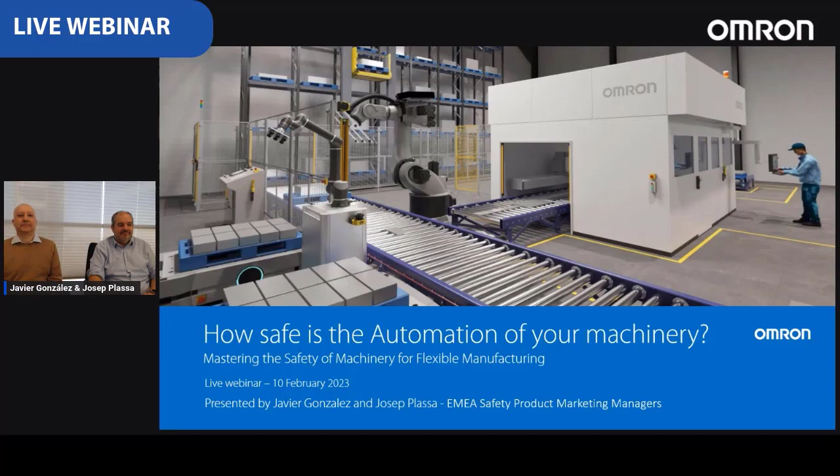Hi, I'm Javier. Today I will perform as the Health and Safety Manager. Hi, I'm Josep, and today I will perform as Safe Automation Expert from Omron. Nice to meet you. Nice to meet you.

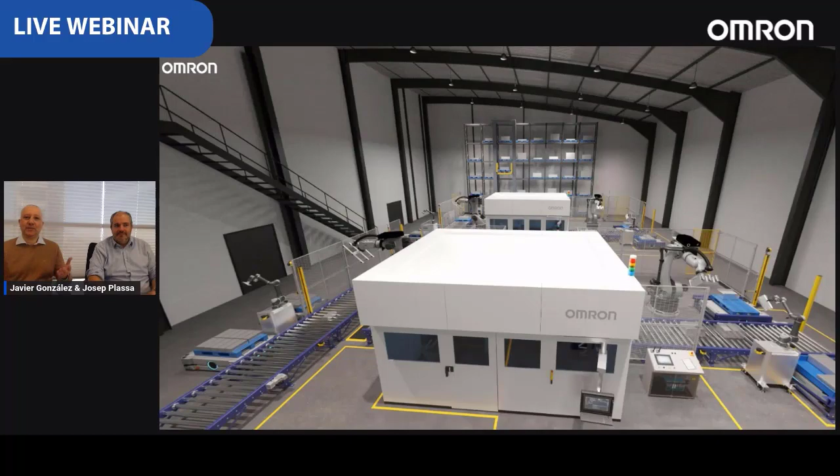So, welcome to our factory. As you can see, in our company, we are producing battery cells for the automotive industry. We are implementing efficient and flexible manufacturing by employing new technologies. Our target is to become a world-class production leader in the automotive industry by proposing an intelligent production automation system.

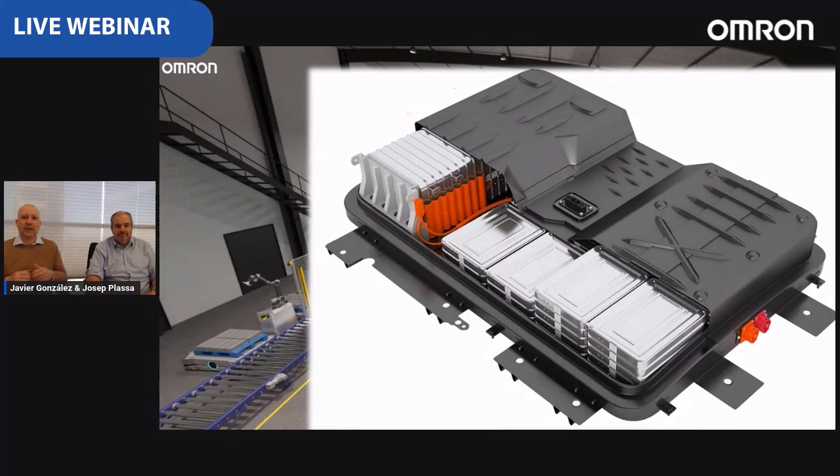Could you please introduce your company briefly? Because I'm not very familiar with it. Yes, of course. Omron is a safe automation supplier which advises, produces, and delivers globally, providing safe automation solutions and sharing expertise with you. Let me show a short video about our company.

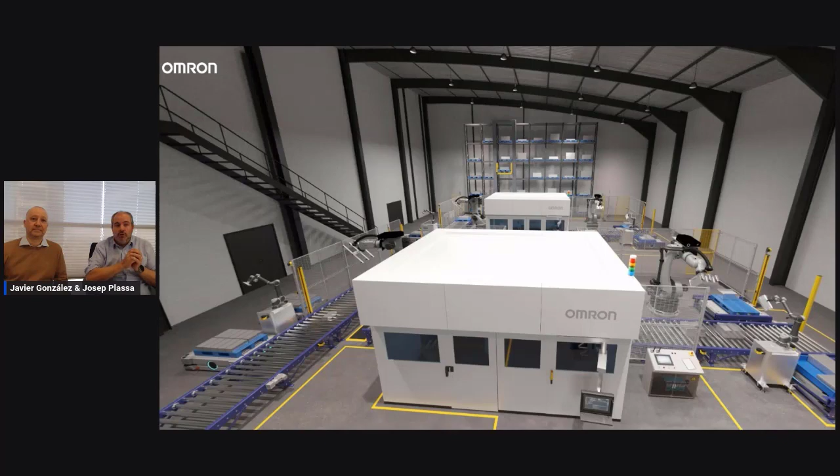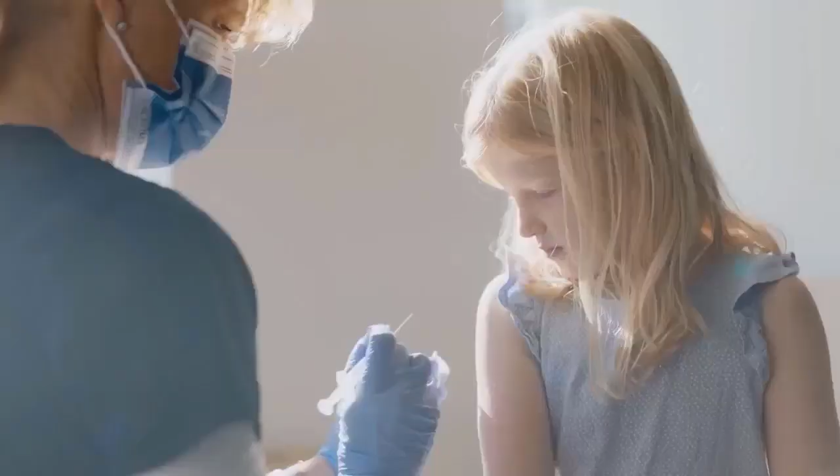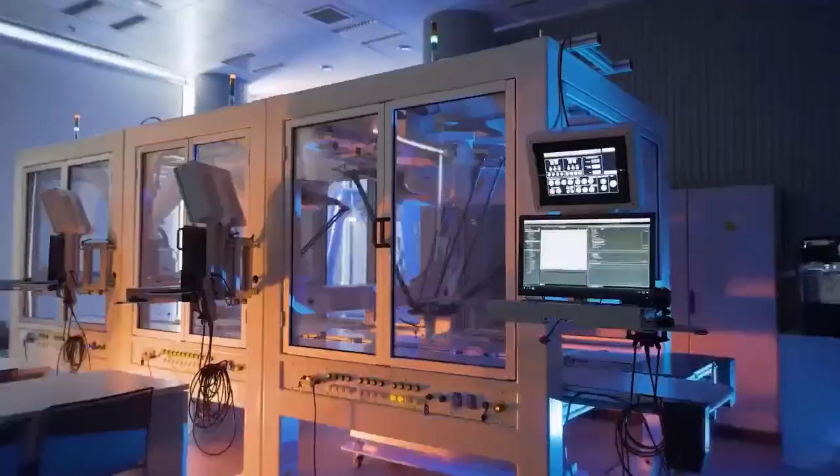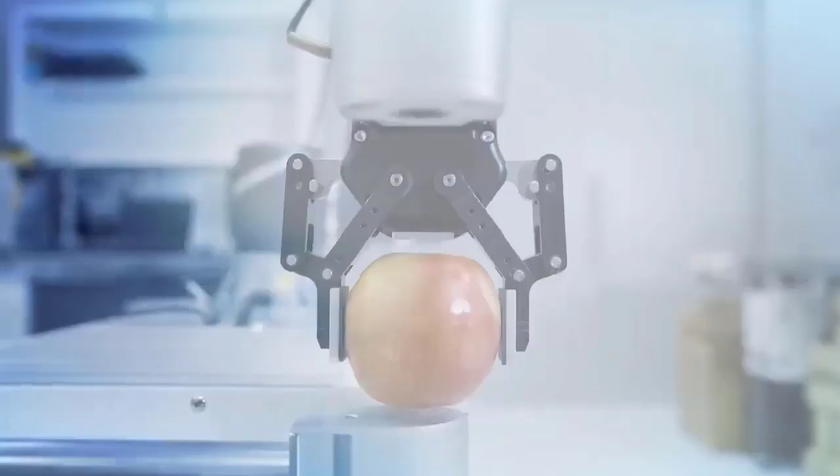Now. Not tomorrow. Not next week. Now. The world around us has changed. It's more personalized, more demanding, more impatient. To stay ahead, you need to give people what they want, when they want it, and how they need it. Manufacturers, we understand the host of new challenges you're facing. Greater customization, increased flexibility, and better collaboration. You need smarter solutions that deliver zero disruption and maximum efficiency. With Omron, you can make it happen. Let's plug and play, move and adapt, make modular popular. Let's make the production line shine while wasting less and innovating more. Let's unleash the power of IoT and set your business free. Now this is creative manufacturing, designed for the future.

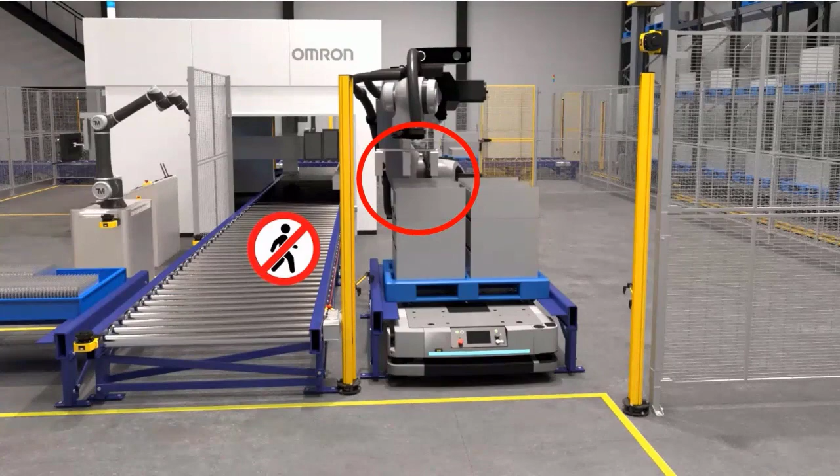Okay, it happens sometimes, but do you know which are the sources of energy that the robot gripper uses? I don't really know, but I guess it's from an electric pneumatical gripper. Did you know if your maintenance operator consigned the electric energy source? Yes, he did. Interesting.

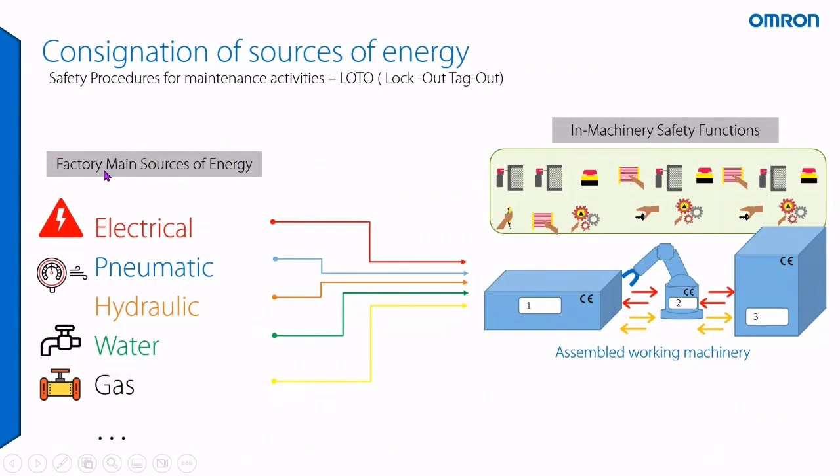Because the consignation of the sources of energy, which is the factory's main sources of energy, are the parts that are delivering it. So in your case, if your operator only consigned the electrical part, the pneumatics, hydraulics and other sources of energy were still supplying the machine. So they should select, consign, and release the related sources of energy which are necessary for the maintenance operations.

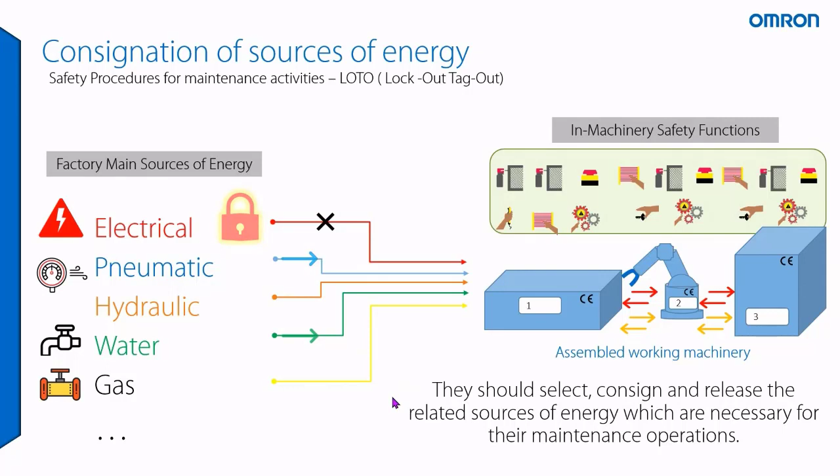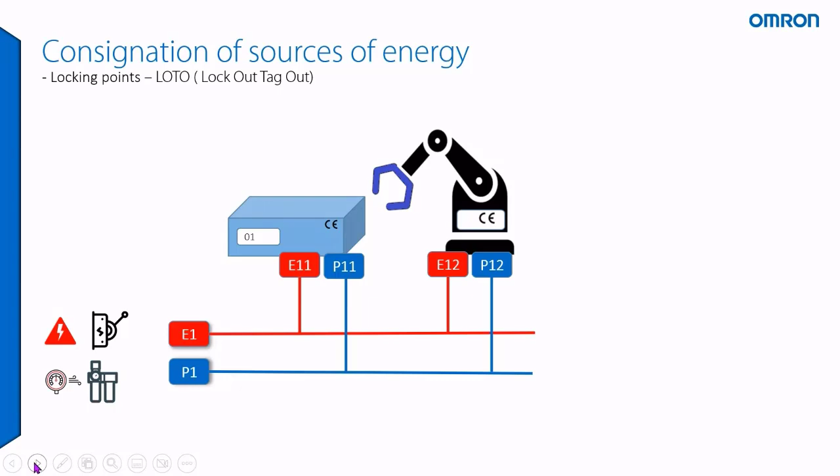But we have in our facilities several intervention points, such as primary and secondary, which you can identify in this image. But as we don't know if some source of energy is still accumulated in the pipelines and the circuits, you must ensure that the energy is completely released, which is a manual procedure.

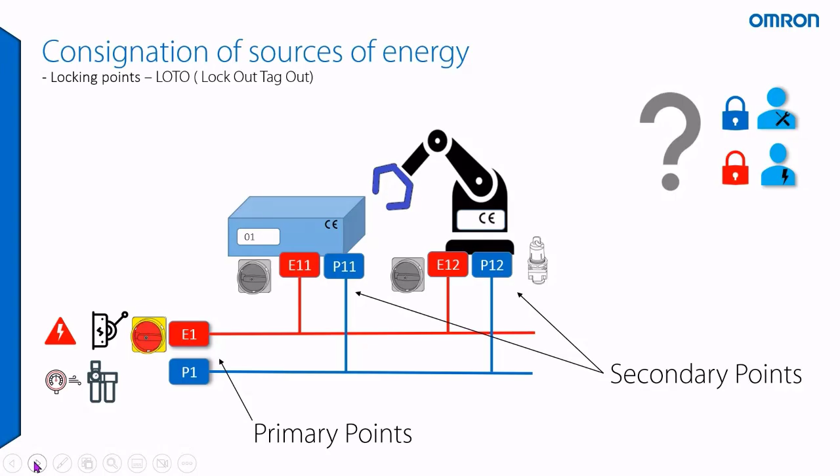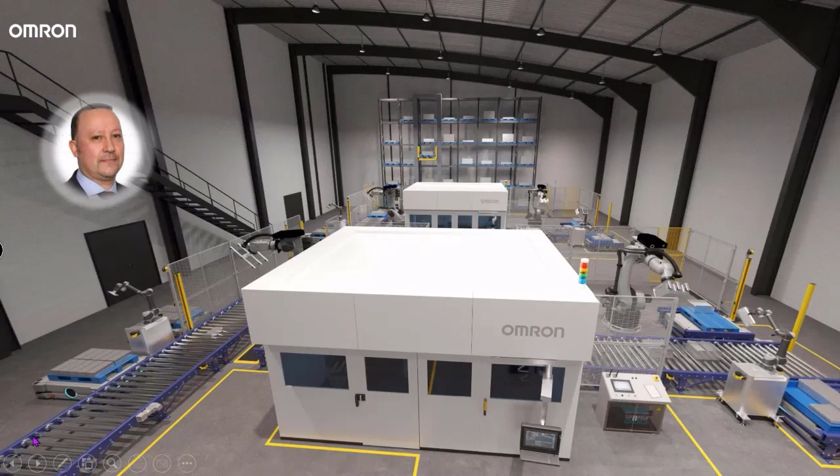All right. I will talk with my team in order to improve the lockout-tagout procedure, and I will ensure to train all the staff members with this updated information. Many thanks. And just one more thing.

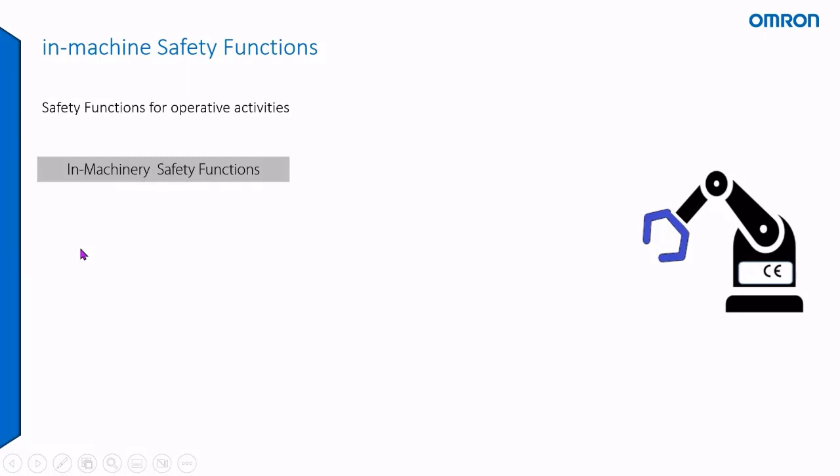I have learned that during this procedure, some operators additionally push the emergency stop to be more confident. Is it correct? Well, it's not correct, but most of the people use it. Let me explain. We have in-machine safety functions, which are embedded in the circuits.

And this reacts individually when actuated. So pushing the emergency stop removes immediately all dangerous movements, but by removing the sources of energy, something similar to the consignation. If the machine is properly designed and integrated with other machines, all dangerous movements should stop as well.

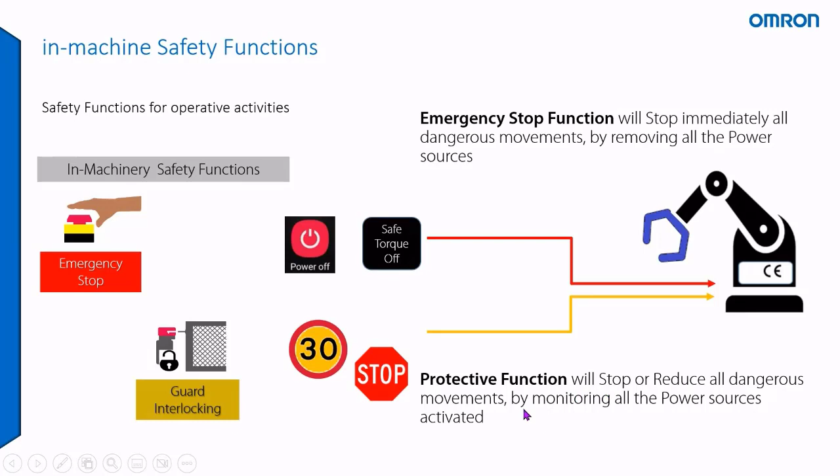Machinery regularly also has protective stop circuits, which have other functions. The protective function will stop or reduce all dangerous movements by monitoring the sources of power, which is something different. Nevertheless, the emergency stop or protective stop circuits are for emergency or safety situations, not for maintenance purposes. And if the maintenance operators have an emergency stop or need to press it during their tasks, there are no other circuits available to help them. So they are somehow exposed during this activity.

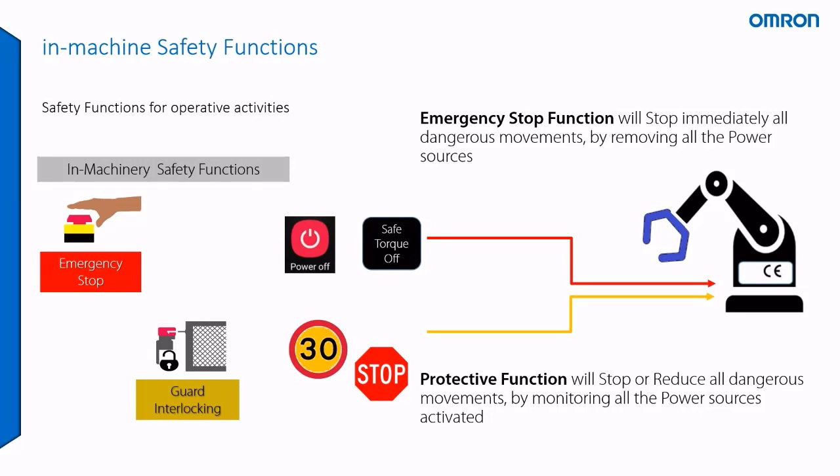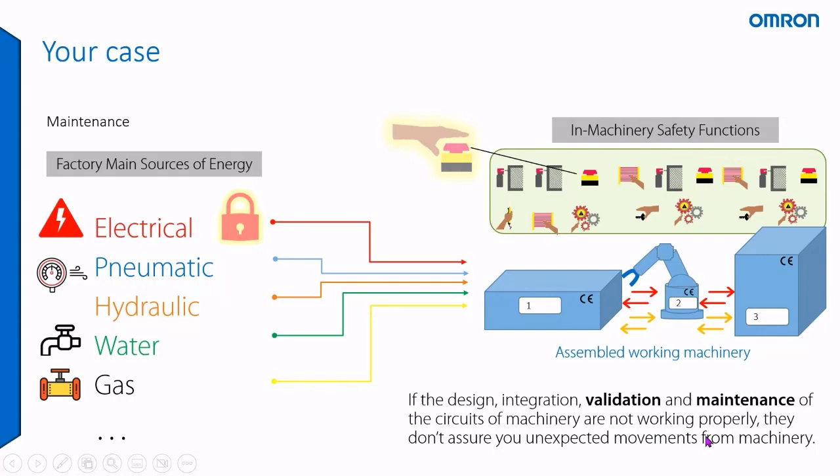So following your question, in your case we have the sources of energy and the in-machine safety functions. This is what your operator is doing regularly. If the design, integration, validation, and maintenance of the circuits of the machinery are not working properly and not maintained properly, they cannot assure you against unexpected movements from the machinery. That is probably the main cause of what happened to your colleague.

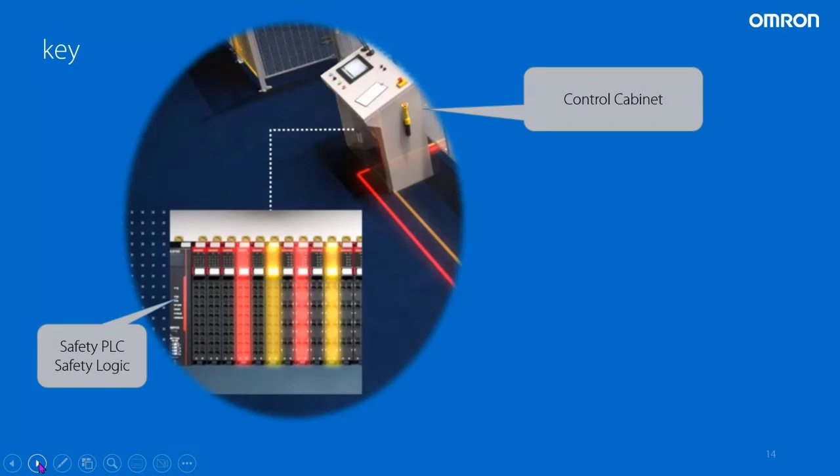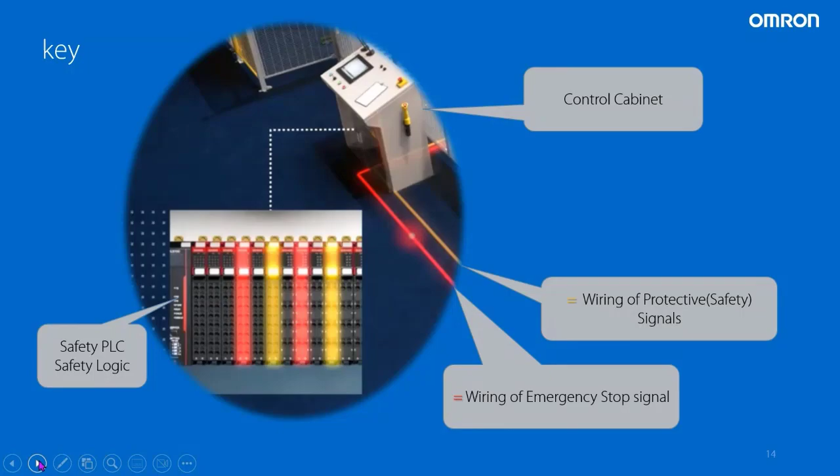Let me show some additional animation where we will identify the control cabinet, the safety PLC, which will act and manage all the safety logic. The red wirings will be for the emergency stop signals, and the yellow or orange wiring will be the protective or safety signals. We will also visualize the flashing lights through the cables.

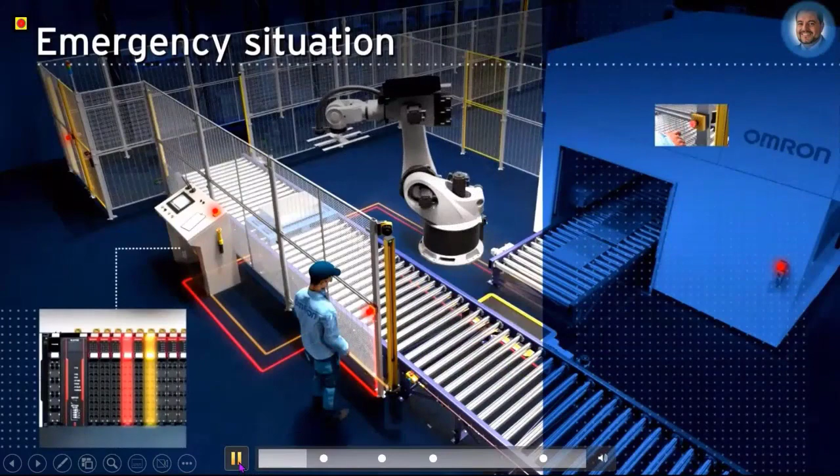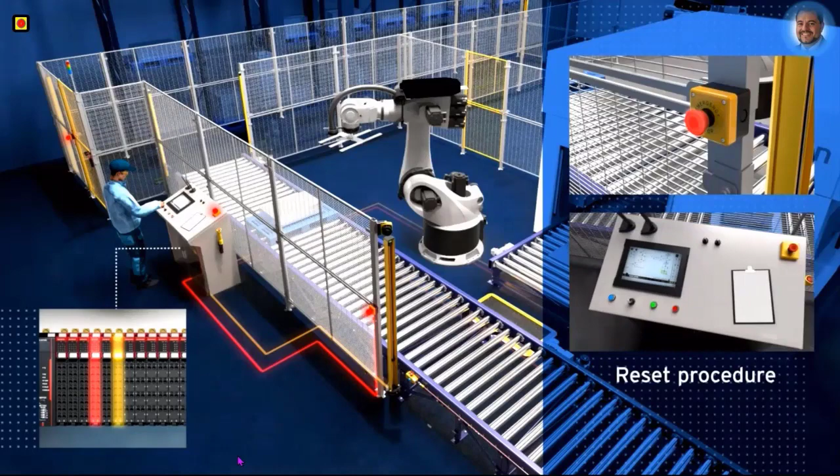Let's see if your operator has an emergency situation. He will press the emergency stop push button and the signal will be transferred to the safety PLC as an input. After that, since the emergency stop removes all power and energy, all movements and all motion are stopped. During this time, the LED should be blinking. The operator then needs to disengage or unlatch the emergency stop, move to the main control cabinet with visibility, reset the procedure, and then start and restart the machine. The signals will go to the machine, give it power, and we can continue working once everything is functioning. This is the case of the emergency stop.

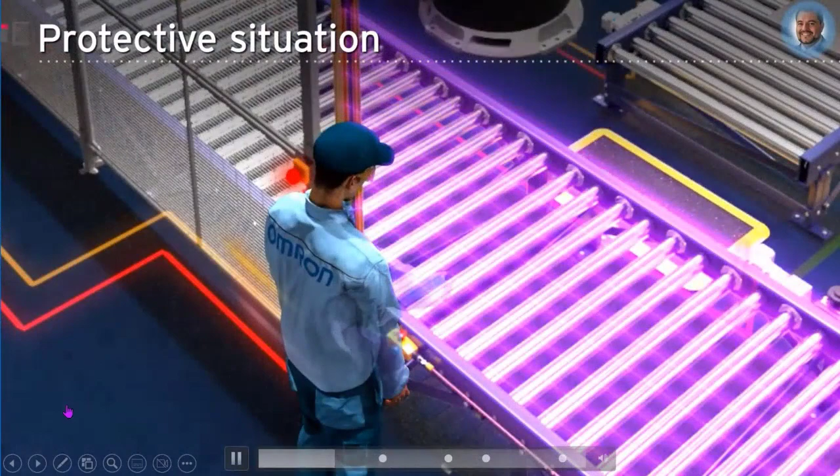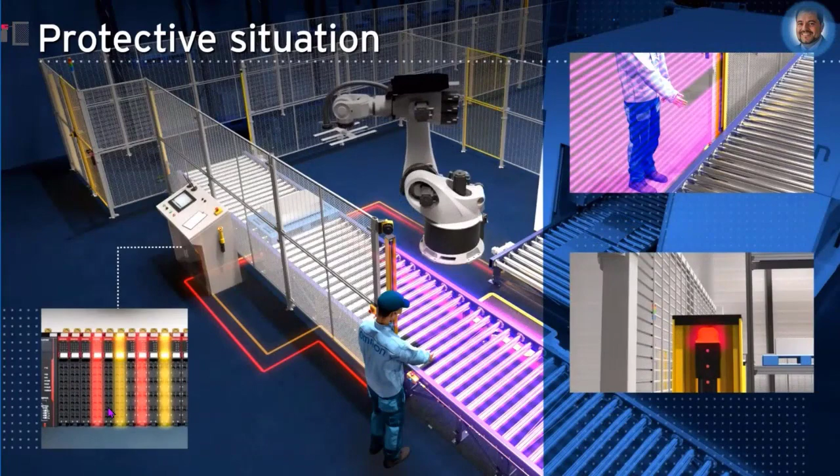Your operator can also have another situation, like a protective stop, which is very similar. I'm showing this in detail because the protective situation could involve another operator or another situation where someone makes a movement detected by a safety light curtain. When the operator interrupts the safety light curtain, we visualize the LEDs and the signal is transferred through the yellow cables because it's a parallel signal—it's not the same wiring, they are different functions. We react in a different way, like slowing down or stopping. The operator can then do a manual reset, followed by a start procedure, so we have a soft start of the machinery and can continue working.

Thanks for the detailed explanation. Now it's more clear, and this information is really helpful for us. We appreciate it. Thank you.

My pleasure. I have another question for you. Next month we have a meeting regarding the introduction of a flexible new machinery into our production lines. Even though we have a lot of experience regarding CE marking and managing legal aspects, our engineering team have some doubts about how to implement it. Could you please provide more technical details about it? Sure, I would love to do that.

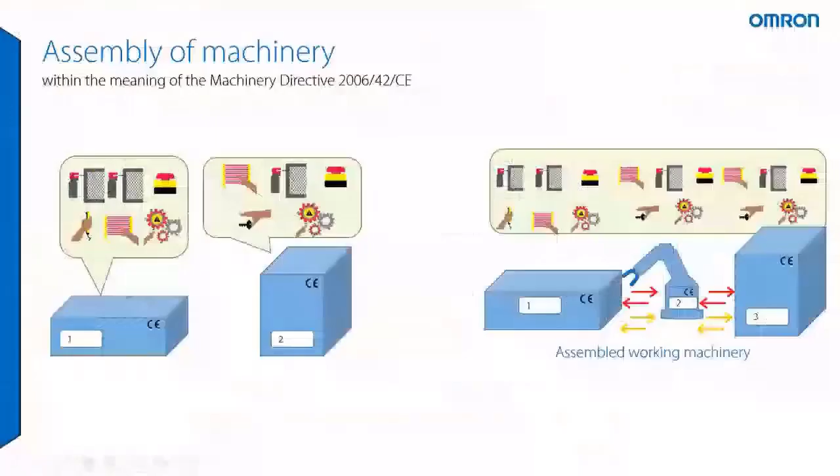First, we need to understand the legal framework. In Europe, the assembling of machinery, within the meaning of the Machinery Directive, is not just what you understand in your local factory. The assembly or disassembly of machinery has many technical implications.

All the examples we will show now are in the context of safety signals sharing the space. That means if we have different machines delivered by different suppliers and we put them all together, this is understood as assembly of machinery. That means any of the signals, either emergency stop or protective stop, needs to stop or affect the entire line. This is the context we will move on with.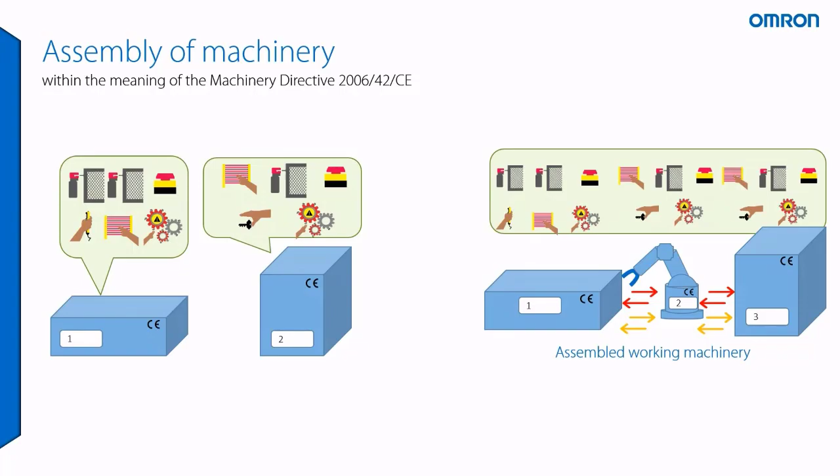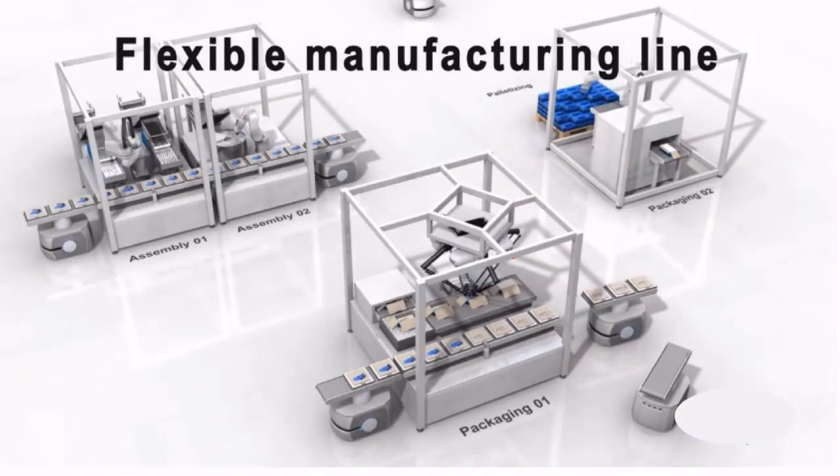Rarely, other machines can have a different way of working, but this is exceptional. Let me put it another way. Here in this example, you will see a linear production line format, or a sequence line format, with several machines—in this case four. But sometimes these machines can have flexible manufacturing, meaning we can put them in another place in our factory, and therefore there is not a line anymore; they are individual machines. But after a couple of orders, maybe next week, you will need to reorganize the production again into a kind of sequence or linear production. I assume this image somehow shows what I am trying to explain.

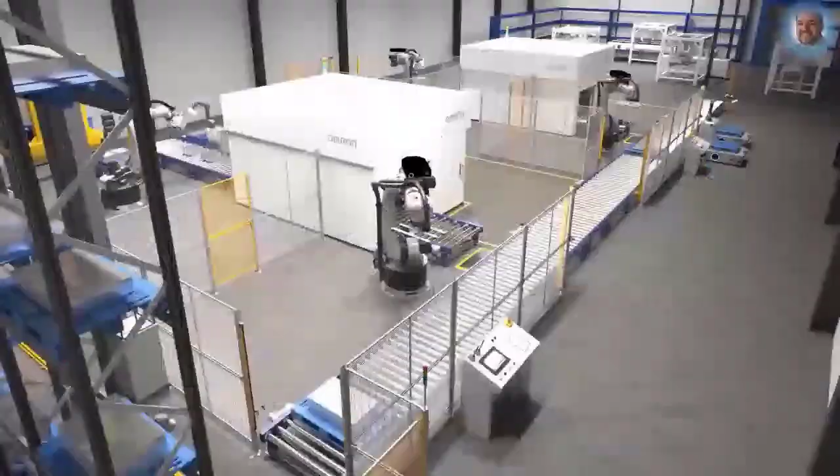Yes, thank you. So let me follow with another example, following your example or your line, which is manufacturing batteries.

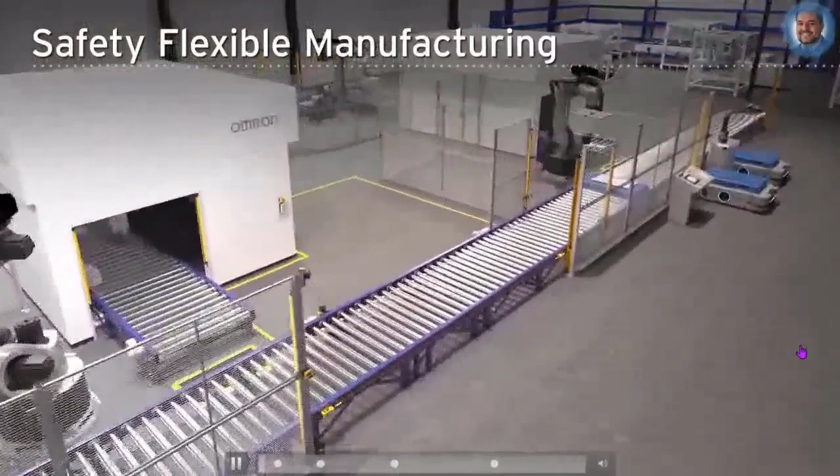Now, manufacturing batteries, you have a static line, which is the conveyor, the robot, and other machines. Now we will add manually another machine. So first we need to follow the example showing adding this manual machine in the current production line in the safety related context.

We should understand that the risk assessment should already be included in the original design. If not, this working mode requires a major modification if it wasn't taken into consideration earlier. In this example, we will see how swapping the protection device signals and linking the emergency stops works.

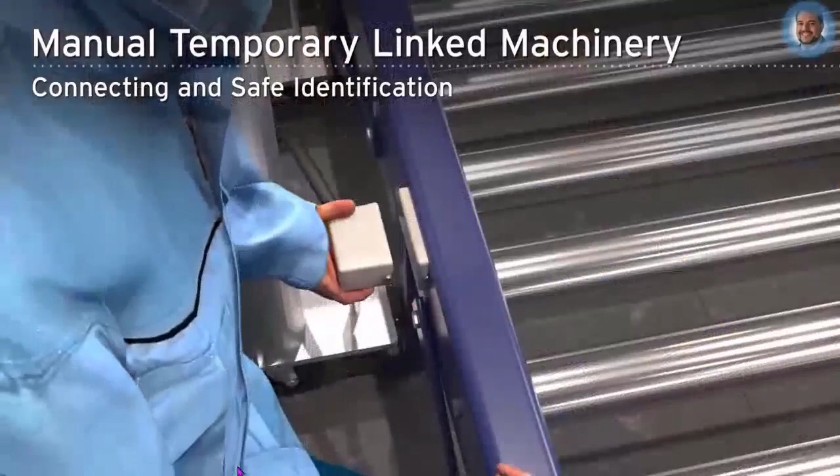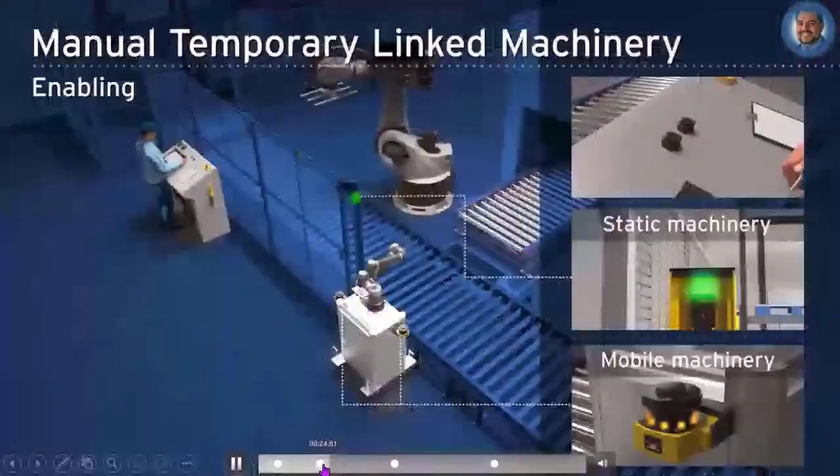The procedure we are doing now is enabling, so swapping the safety signals and linking the emergency signals too, with the new mobile machinery which arrives in our settings. Now the operator is selecting the signals, putting all signals together. All signals will work together. The yellow are the protective signals and the red are the emergency.

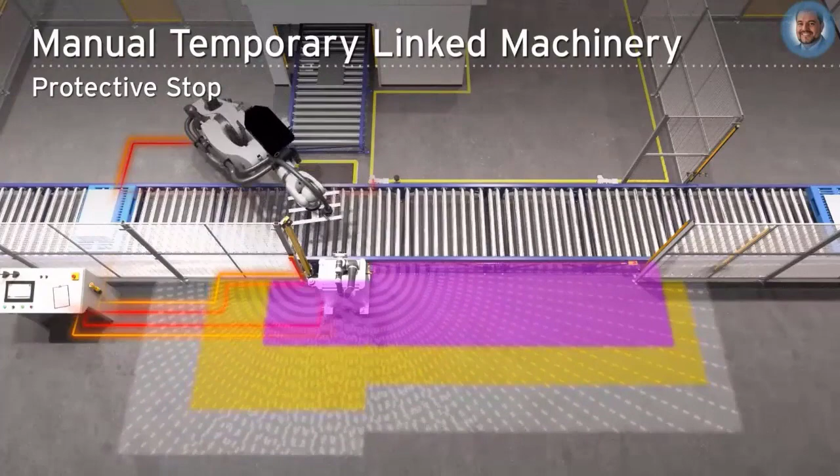Emergency will all be linked into only one group. Now we will swap only the vertical light curtain and the horizontal safety laser scanner. The operator confirms that all the signals are linked. After this confirmation, the entire production line, all the machines are working together, either emergency stop signals or protective, either vertical or horizontal.

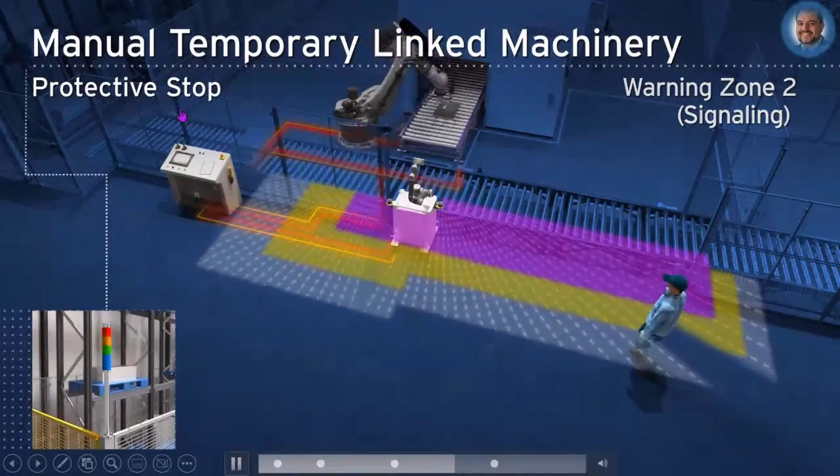In this case, we will show that the laser scanner zones will react directly and affect the entire machine, which is temporarily added. Now the operator will move into some warning area, detection area warning 2, and it will be signalized. Now the operator is moving to another zone, and we slow down with the safety signals, which you can see moving inside the copper cables. Once the operator moves to another area, the reaction will be different.

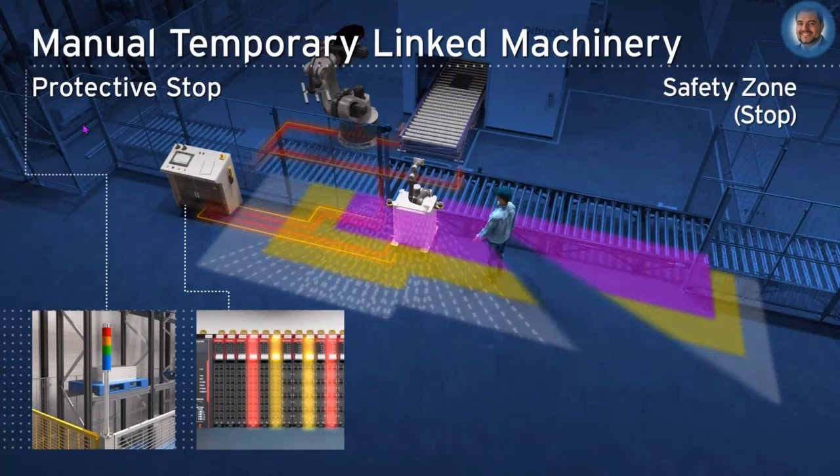Of course, now we are showing only the protective stop. If in this situation any emergency stop is pressed, the entire line will be stopped by its own means. Once the operator moves away, we can resume production automatically.

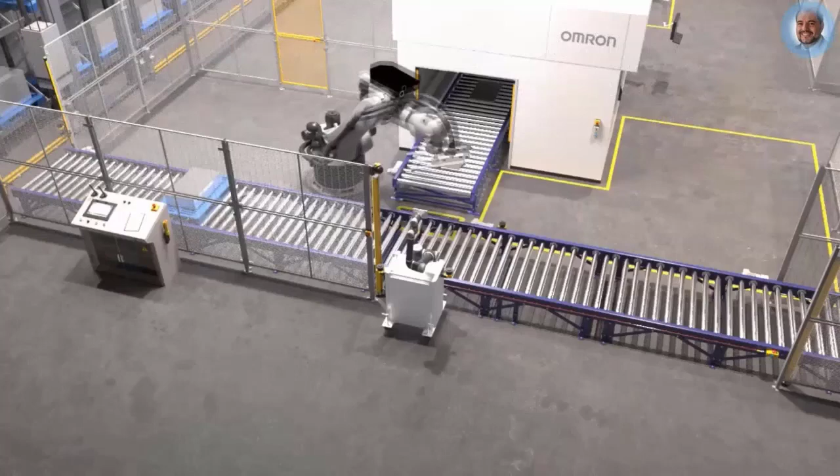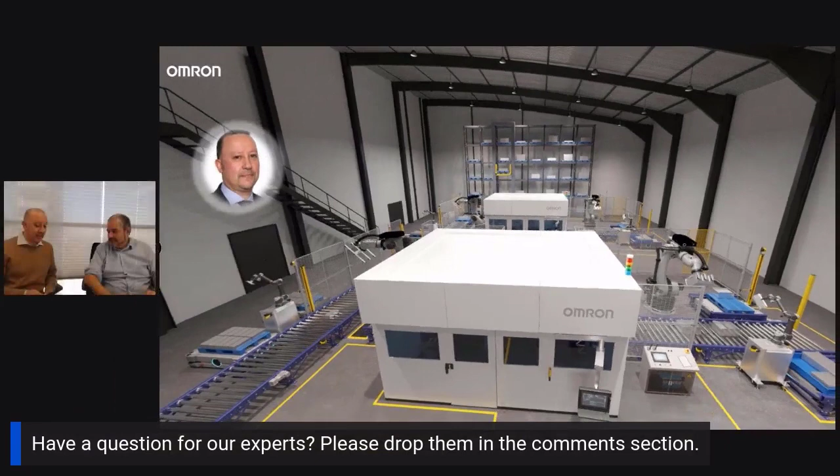That's wonderful, I like these videos. It's clarifying very much what we are asking for. Thank you very much. But I just received a message from my colleagues in the engineering team that they would like to link these machines automatically, not manually. How should we do in such a case? So do you mean that the human will not interact at all? Exactly. Is that possible?

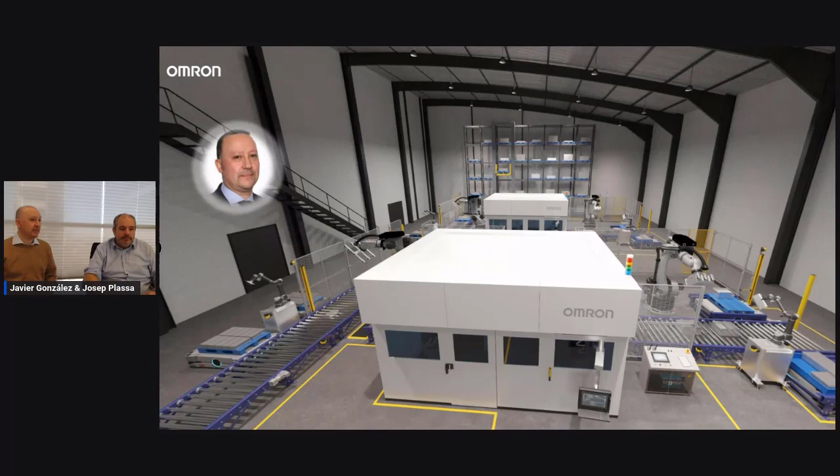Yes, it's possible. Of course, for all of that, we need to work always with the safety signals, which means safety signals work with positive logic. That means when everything is working properly, the signals should be status on, and that means a safe situation. If the energy or any causes are not under control of the safety logic, then the signals are off. So the absence of the signal is considered off.

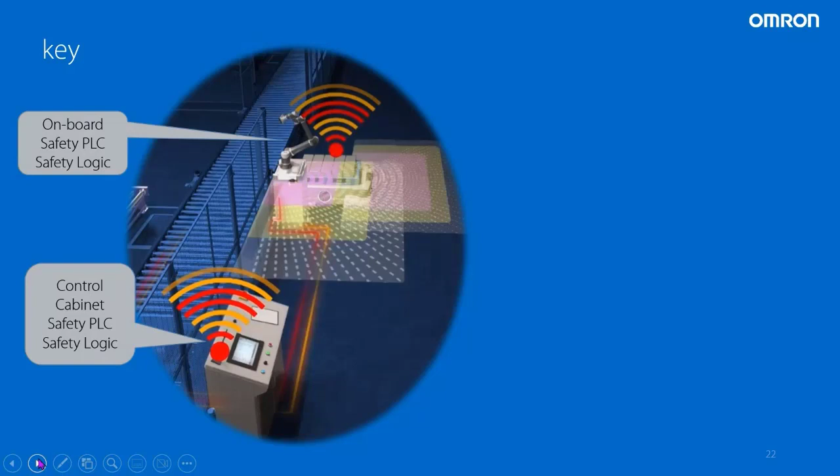Let me show another animation where we will focus on the control cabinet for the safety PLC, where the safety PLC is embedded, and will connect with the onboard machine. This machine is automatically guided, so it has its own control, which is why we call it onboard safety PLC or safety logic. We will use copper cables, so standard wiring and standard sensors, but also wireless signals. Using wireless, we avoid the operator needing to be in place to connect things. Of course, everything needs to be ready and done engineering-wise and according to the risk assessment.

We will use the wireless signal as a black channel. That means we are using the safety signals over this black channel. We don't know what happens inside; we look only at the entrance of the tunnel, this black tunnel or black channel, and we look at the results. For that, in yellow or orange, we will signalize the protective signals when all of them are correct. In red, we will signalize the emergency stop signals.

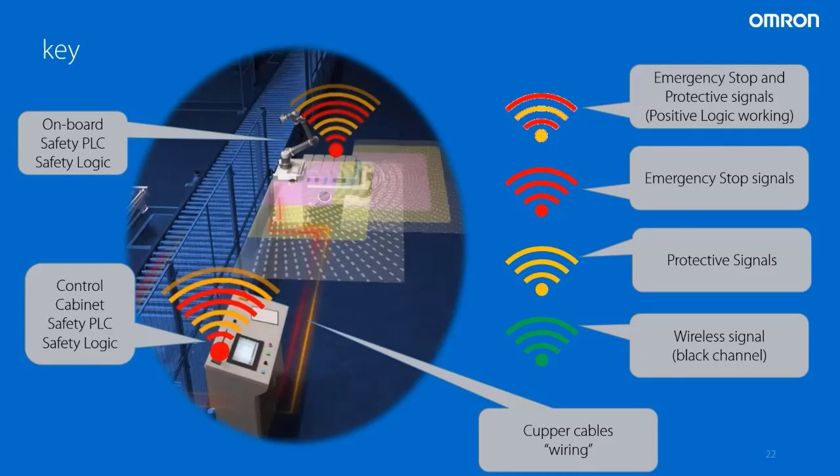And in bicolor, red and yellow, we will show that all signals are moving on simultaneously, each with different targets. So in the next example, which is what you are asking about, we have another machine and the connection will be automatic.

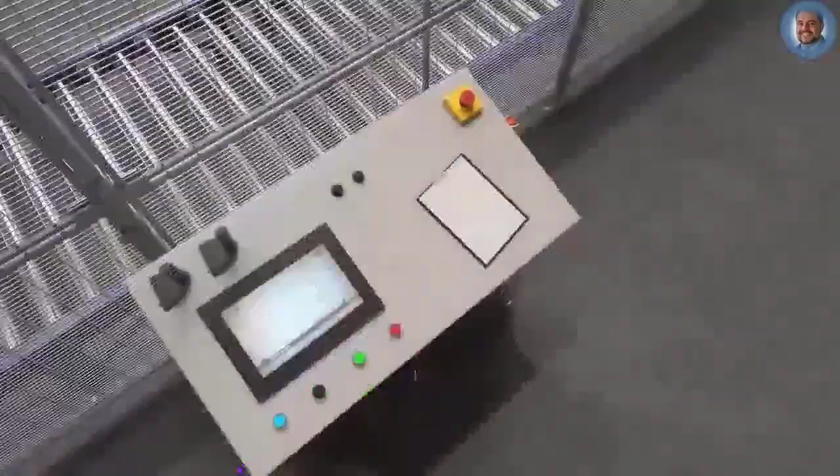So let's assume we have a new batch and this operating mode should already be included in the risk assessment. If not, it's considered a major modification. So the machine is not linked at all, it's just selected.

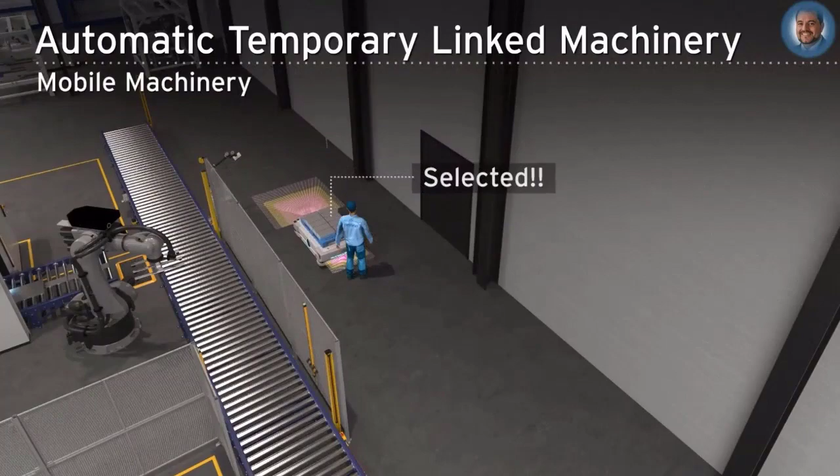We see an AMR or AGV, autonomous mobile robot, which is coming to some slot place, which is now monitored by the horizontal laser scanners. So the machine is coming automatically into some place.

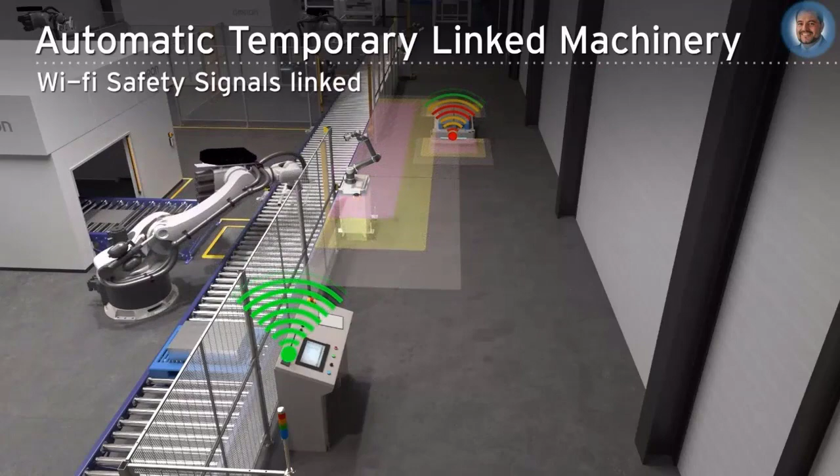After dialogue, now we start the wireless and start the Wi-Fi signals. We start to communicate the safety signals. When the safety signals are automatically confirmed and we know in which area and position we are, then we can confirm automatically and do the enabling.

So the vehicle will automatically go into a parking position. Once it's docked or parked, we enable the signals. What is important now, and maybe I will repeat the animation, is you will see these areas sweeping from one another automatically, always from large to small for positive and for safety, not vice versa.

We are enabling, so now they are enabled. So the machine is working, all linked. We are using in this case the protective stop, laser scanner horizontal from the new machinery, which is linked temporarily in the automatic way. We will use it as a protective stop for the entire robot cell to clarify that.

You will see that the signals will be detected from the sensor when the operator approaches. The signals will be transferred from the logic on board, the safety PLC logic on board, and switch off the signals of protective stop. Wireless signals will be transferred to the main control cabinet where another PLC will monitor those signals, and then the reaction will happen. So please have a look.

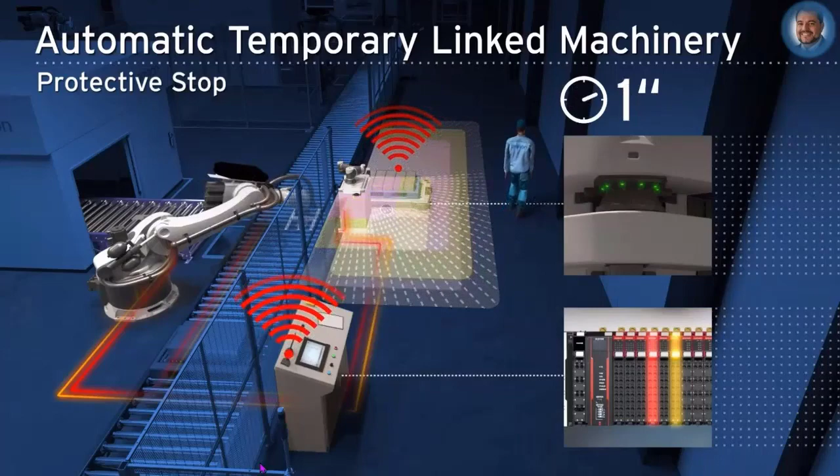After the operator moves away from the area, we automatically restart the signals, not the functionality, and we can proceed automatically. This is how that works.

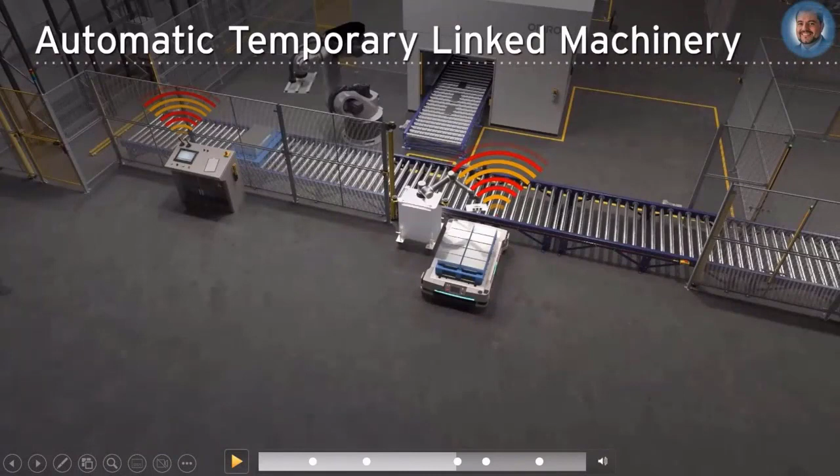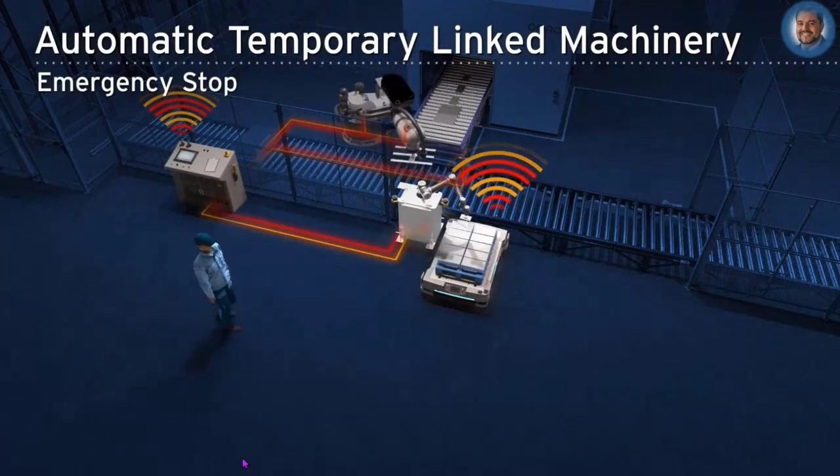Now we will show how, if the emergency stop signal happens, wireless as a black channel, we will use exactly the same situation. But now the red signals will disappear because the operator will push the emergency stop signal, and only the protective signals are still alive. That means the signals are completely individual. Although they combine safety PLC logic or cables somehow in functionality, the signals are completely independent.

After that, the emergency stop should have a manual reset function. In order to resume production, the start procedure should be done manually, because in this case the emergency stop cannot be done automatically. Once the production batch is finalized, the machine can automatically undock and unlink on its own without the intervention of any manual operator.

So I assume with the help of this animation and videos, I try to respond to your question. I assume that is somehow clear to you.

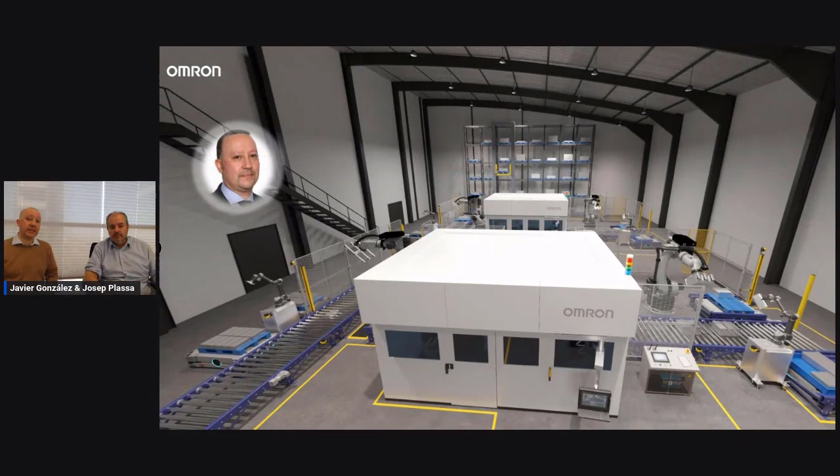Yeah, that's perfect. It's exactly what we need. It is exactly what we were expecting. So I see that I like your proposal, and I see that Omron has very good experience on safe automation solutions. I believe that Omron's solution is going to maximize our production flexibility by increasing the cooperation between machines, as well as collaboration between humans and machinery.

Engineering team will contact soon for more detailed information. Thank you very much. My pleasure and my colleagues' pleasure.